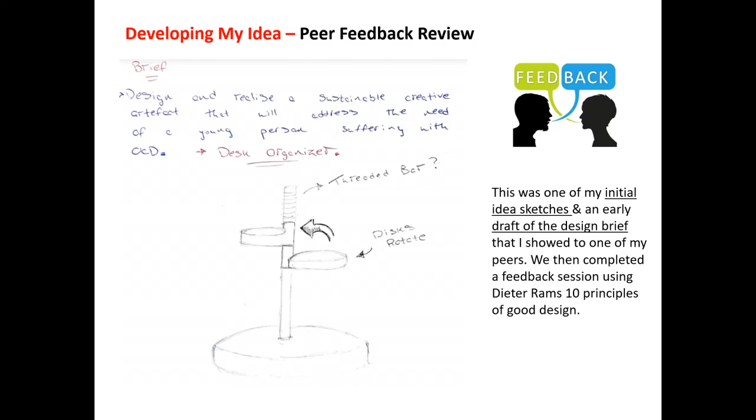Looking at my developed ideas, this is one of the initial sketches I showed my partner for peer feedback. We used the 10 principles of good design from Dieter Rams, and looking at the scores, they were all kind of high.

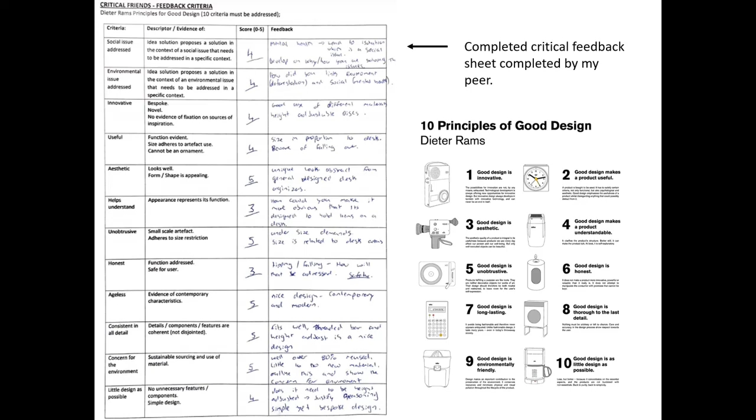What I really wanted was honest, critical feedback, but I think it was a case of being afraid of hurting feelings—and I probably did the same with my feedback to him. Although I still got a few ideas out of it, it would have been more beneficial to get honest opinions on everything and take the emotion out of it.

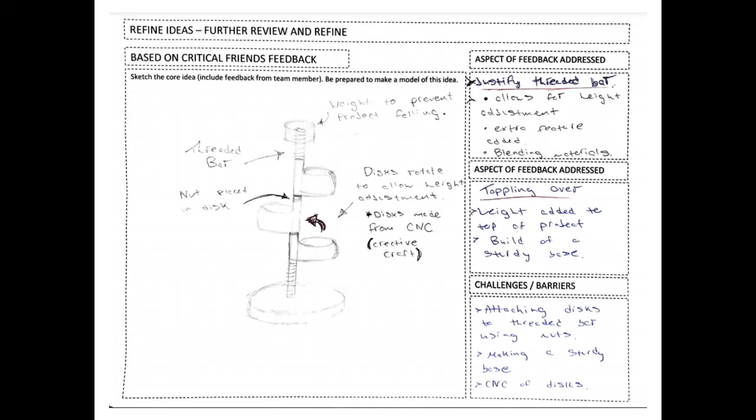This is how I adjusted the design directly after the peer feedback session, based on the feedback I got. Then I started going through some potential processes.

I looked at how I would join the threaded bar to the rotating slot, considering a couple of different approaches, and then looked at the creative craft. I was hoping to include CNC for the creative craft, just to gain more knowledge in it, since there are loads of areas where CNC could be used in my solution.

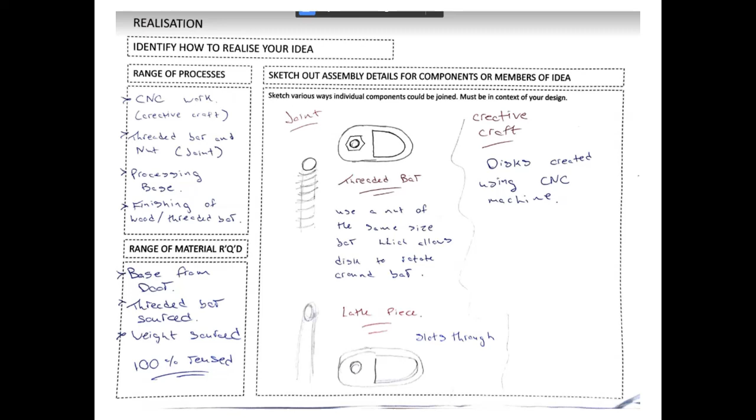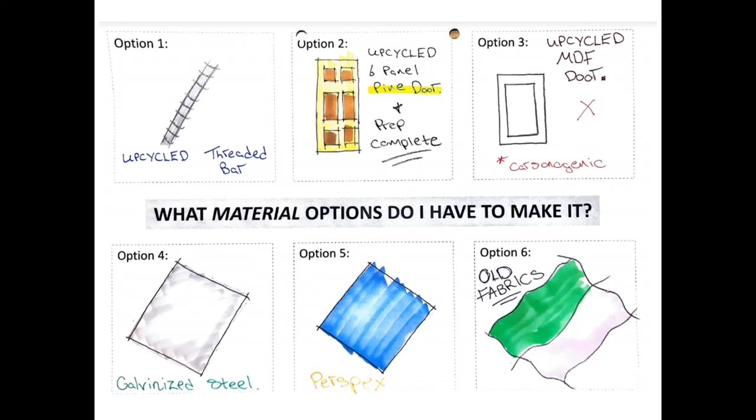Looking at material options, I had an upcycled threaded bar, a 6-panel pine door, and MDF from a cabinet door, which I scratched right away since it's carcinogenic and wasn't the most attractive piece of wood I'd sourced. I also had galvanized steel from a workbench used on my grandfather's farm, perspex also from the farm, and old fabrics like t-shirts, cloths, and towels that I have at home.

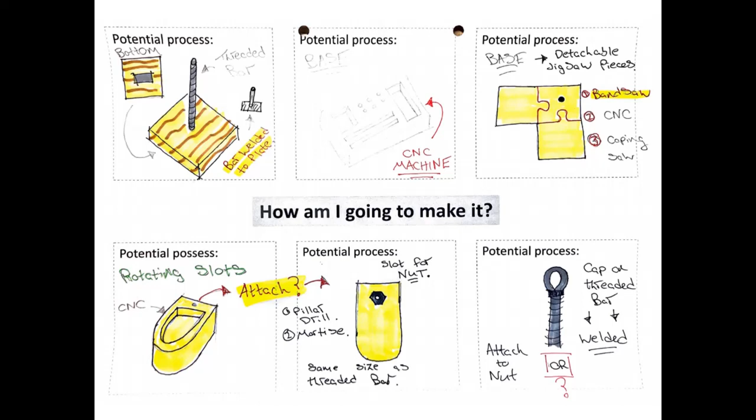Then I went through how I would actually make it, looking at the processes: attaching the threaded bar to the base, the different types of bases I could use, and how to make the rotating slot. This is where I was hoping to bring in the CNC for attaching it, and finally how I would finish off the top of the threaded bar to make it look appealing and finish off the project.

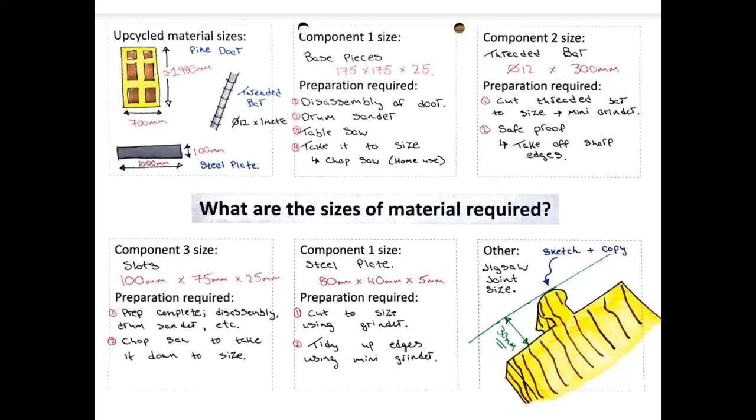Going through the sizes of the material, I definitely had enough anyway, especially timber from the door, so I got a lot out of it. I went through the different sizes of the different aspects of the project: the base pieces, the threaded bar, the slots, the steel plate I'd use, and finally the joint. I've completed the project now and stuck to all the sizes I gave.

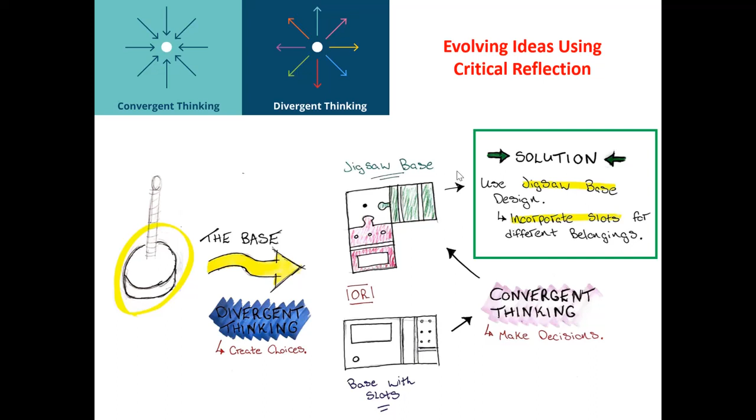Looking at my thought process, taking the base as an example. First, divergent thinking, creating choices - I had the jigsaw base or the base with slots. Then convergent thinking, making decisions on those choices - I went with the jigsaw base. But my overall solution was a mix of the two: using the jigsaw base design and incorporating slots on the different pieces for holding material or equipment on the desk. That's how I evolved my ideas using critical reflection and convergent and divergent thinking.

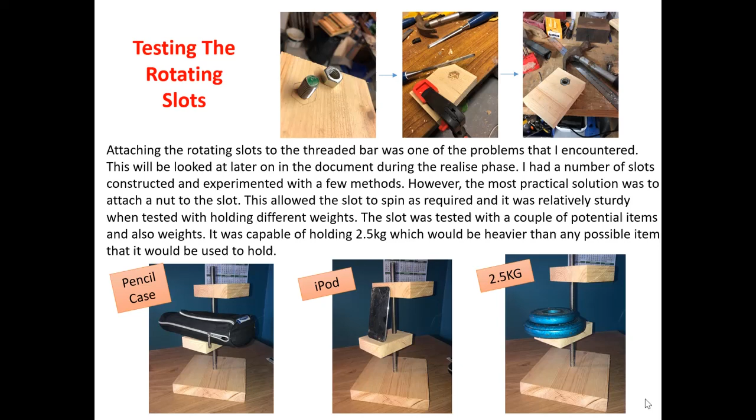In my experimentation phase, I tested the rotating slots. I constructed the slots, attached them to the threaded bar, and tested the weight with a few things that were on the desk - pencil case, iPod, iPhone - then actually tested it with weights. I put on 2.5 kg, not wanting to risk breaking it, but it definitely would have held a lot more. You're not really going to find anything heavier than that to put on the slots, so 2.5 kg was a sufficient test, proving it was sturdy and safe for use, and that the nut and threaded bar was a good way of forming the rotating slots.

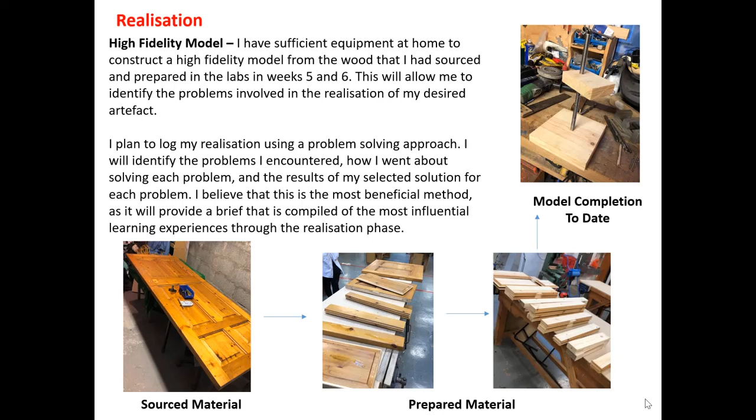Then onto the realization - again we're doing the high fidelity model. I'm going to make it as best as possible with the equipment I have, to get the most out of the learning experience, and to learn about the problems I'd encounter and how I went about solving them. I'll do a SolidWorks model as well, but I don't think you'd get as much out of just doing that alone, so I'll do as much of the project as I can and look at the problems I encountered and how I solved them. I think that's the most beneficial way of going about it.

The second problem, which I'd already worked through in the experimentation phase, was how to attach the rotating slots to the threaded bar - again just using the threaded bar and a nut, which fitted on, rotated around, and was sturdy as I had experimented with earlier. So today, that's everything I have for the create phase. I'll keep developing my ideas, keep experimenting with them, and track how I go about making my solution.